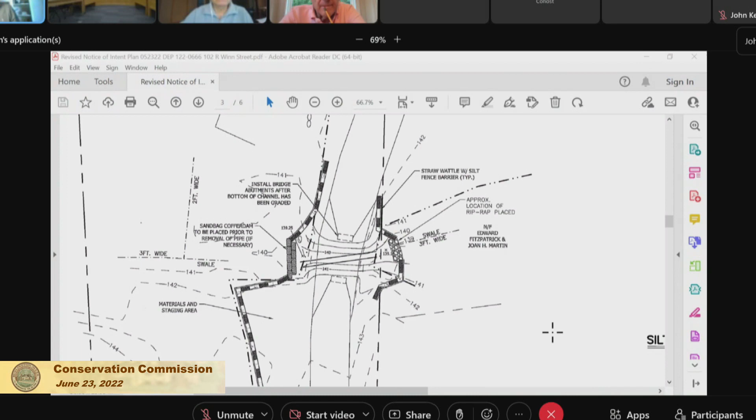He did, I think when we left the meeting last time, we were going to try to withdraw the old file number, but we're going to go in a different direction. I can clarify that. I probably made things overcomplicated last meeting when I said they should just close out the original order. The original order was for the construction of the house and the sewer line going under the stream.

And that was basically, obviously, the stormwater permit is part of the notice of intent for the construction of the house. Thinking further, we have this separate order for the actual work in the culvert, in the stream. This is all part of the same application. Well, the enforcement order was the result of unauthorized work in the culvert, which wasn't part of the original NOI.

So thinking about it, I realized I made it overly complicated. We just should keep both orders open. One order, the original order, was for the construction of the house. The sewer line is now not going under the stream, but it's still going to be in the buffer zone because it's going out to Duncan Road. So it's a less impactful project, and we can approve that as a minor engineering change, basically moving the sewer line from going out to Winn Street under the brook and instead going over to Duncan Road.

Then the filing for the crossing should stand on its own, and that's what you have before you on the agenda. Just the crossing, which was initially going to put in a box culvert to replace the round metal culvert. Since they no longer need that driveway, it's just going to be a footbridge with no culvert. So it's a big improvement on what originally was there, better than the box culvert they proposed. We should just approve that project and close this order out. So they'll have two orders of conditions: one for the house construction and sewer line, and one for this culvert/bridge.

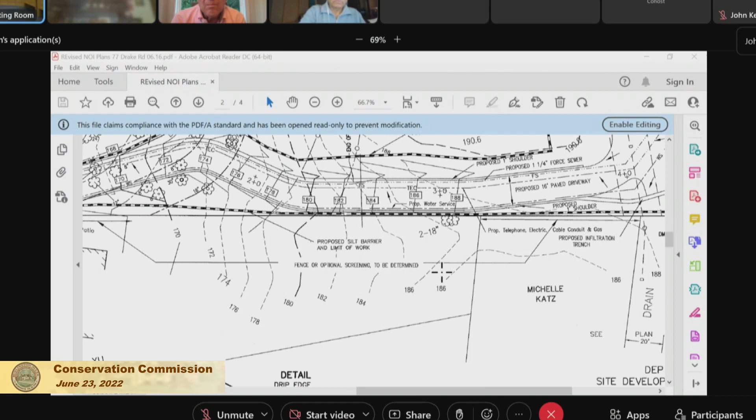And the same thing, Mrs. Katz, I don't think... well, I'll be looking into your lights. I said I don't think you'll be able to see it. Probably the last 50 feet of her property, if you Google it, you'll see that it's very heavily wooded. So go in there and put a few evergreen trees or something in there. But I'm happy to look at it at the time when the driveway's in and done, and I make myself available to my neighbors.

So the note is on the plan. All right, so it sounds like you want to be a good neighbor, is what you're saying. Sure, I'm gonna live there. I get it. Okay, now let's see if the rest of the commission has any questions, and then we'll see if anyone in the audience wants to participate, and then we'll go from there.

All right, so on this one, Indra? Nope. Okay, how about Ed? Anything further on this one? Nothing to add, thank you.

Okay, and Bill? I do want to state that I appreciate the amount of effort you put into working within the system and within all the rules. I know you had heard me speak against this project in a previous venue, but given the fact that the rules have been followed and the process allows for it, I wish you luck in this dwelling, and I'm somewhat envious. I think you're going to have one of the nicest house lots in town.

I question, I wonder, have you had any further discussion with the neighbor about the kennels? I have not. He was here at the last meeting. I told him when I got this wrapped up, I would be happy to sit down with him. Okay, I'm looking at it, I'll probably give him 6 months or 9 months, because it's gonna take me - the time I start the house, it'll be probably September, October. So I'm looking at probably having the house done by June or July, so I'll work with him.

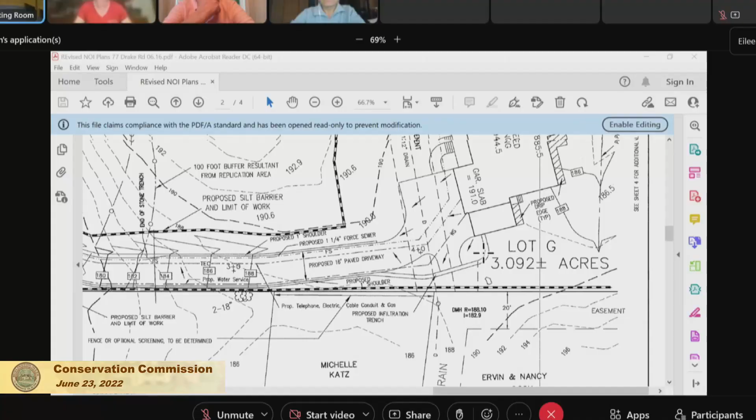Now the second thing - before you move on, the trees in the driveway area on the plan, actually shown on the plan - yeah, there's a limit of work around the house. If you lower it a little, the 100-foot buffer zone comes up fairly close to the house, yes, on the left side of the plan. So presumably there are trees in the buffer zone within the limit, and those trees are not marked on the plan, so we don't know what's in there.

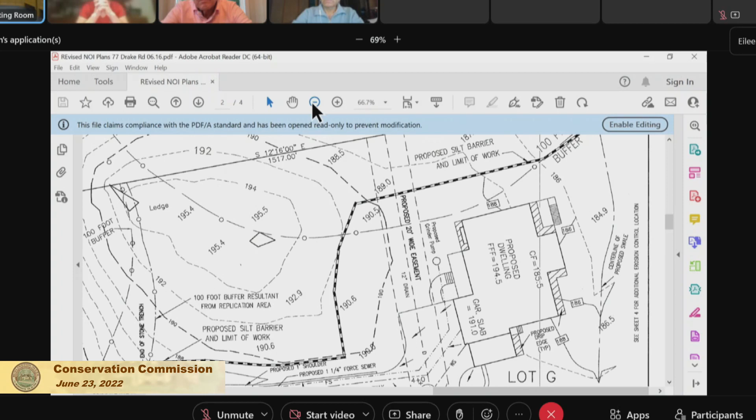Yeah, I've got plenty of room on the other side of the house. The only trees I would remove, when I get in there and get the house going, are anything that looks like it could be problematic in a windstorm or something like that. So does that mean you're not clearing the full limit of work? 100% of the limit of work, no, I'm not. It gives me that limit of work, but no, I'm not planning to clear all of it.

There's a lot on the front there. That limit of work, I'd say I'm probably going to stay 8 or 10 feet from it, but when we're grading in there, because right there it's not too steep at all, but coming up, as you can see the contour lines, it does get a little steep. Behind the house, I put the limit of work there and I don't plan to go beyond it. For the backyard, I'd probably cut trees there to give myself a backyard, but I'm not as concerned with the front yard.

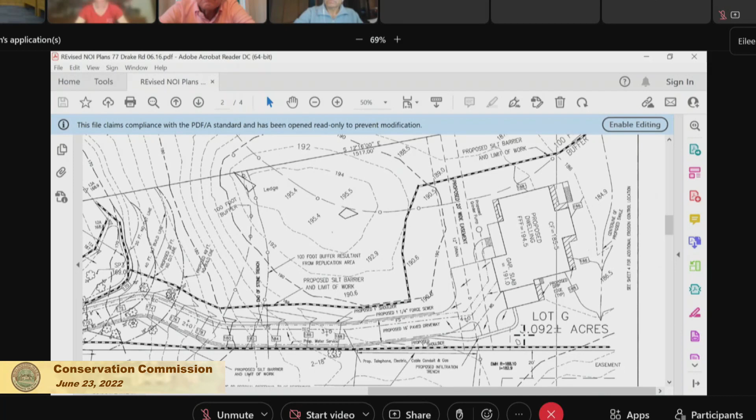And there's a lot of pavement - you've got the driveway for the garages. So if we have trees that aren't marked, you come and talk to us and we'll propose something. I'm happy to do that - get the area cut and we'll work it out. I'm not trying to limit you from having a backyard, that's not the point. The point is, normally we have a 1-to-1 replacement, and particularly in a wooded area it would be nice if there are places that need trees because you're taking some down - let the staff work it out with you. I agree with that. Yeah, I have no issue with it.

The backyard, I would clear - I think it's about 50 feet. Yeah, you may want to clear some trees, I'm anticipating, just for a modest backyard. When I get the limit of work all staked out with the hay bales and everything in, we can look at it. I'm happy to take a look at it. Then you'll know exactly what we're working on. Fine. Okay, you okay with that, John? Further adding the language about trees in there?

Permit, okay. If I could just make one note for the replication area - Gary, this is Leah Basbanes, Wetlands Consulting. Regarding the replication area, when Gary was mentioning leaving some of the trees in there, I'd ask that during construction we allow some flexibility and in-field adjustment. We need to get the proper area of 1,450 square feet, but we also want to save certain trees and not interfere with their root structure, so the configuration may end up a little different. I'd ask for permission for field adjustments to save the trees while still excavating to the proper size.

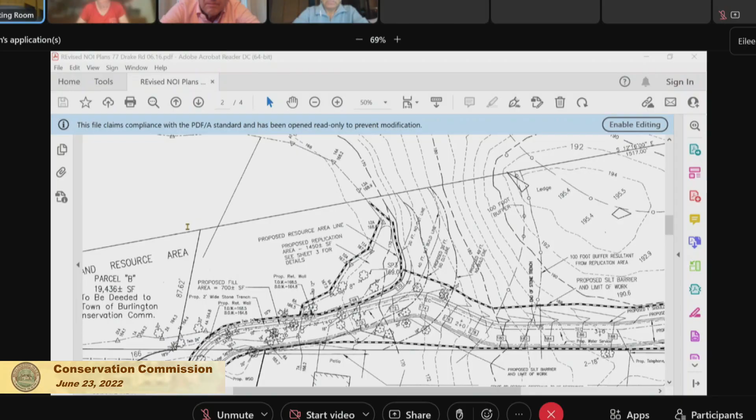Yes, thank you. So you must be pleased that this has gone through fairly smoothly. I am, but I stayed on top of it in the meetings we had - the original meeting I had with Leah and Chris Mello, back and forth several times before we came to see you. That was very helpful, and I think it shortened this whole process.

If you're pleased with the process, that must mean you're in a good mood, so therefore I can ask my question. I've got a couple comments I'm going to add first - I'm setting you up, so hopefully I'll get a good answer from you.

The area that you're proposing to give, we're very grateful for. It amounts to about 150 feet from the stream bank, the wetlands - I believe that's where the stream wetlands flags are, this is what I've penciled off with my ruler - and it's about 50 feet from the path. Would you consider extending the amount you'd grant to the commission for the whole 200-foot riverfront?

Somebody asked that at the last meeting, didn't they? Yes, they did, but I thought you'd be in a really good mood so I'd go at it a second time. Let me tell you, just to put a little more sweetener on it - it looked like about 270 feet. Right now you have between your erosion control about 320 feet, roughly, as I penciled it off. If you gave us 50 more feet and came up, you'd still have 270 feet from the back of your erosion control. I think I did it right. Okay, yeah, you're not far off.

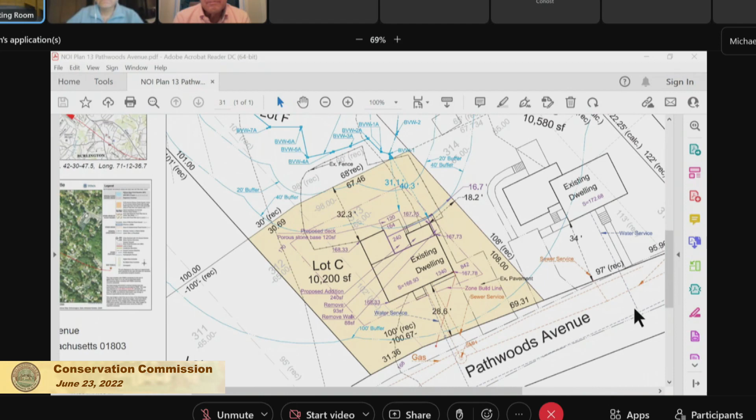It's owned by Michael Murray. You may remember we did the permit for that house there. And I believe he did send a note to McLaughlin saying that it was his property. I thought that once we have the order of conditions in hand, we would talk to him and see what he would like.

Oh, because I had put something in the conditions about this. If we can touch on it, if he makes an issue about the fence, we will, but if he's not gonna ask you to move it, then why would you? That's exactly right. So if he will let the fence stay in place with the agreement that we understand it is his property, that would work for us as well.

Okay, anything further, Eileen? That's my only question. All right, so, Ed, anything further? This one is 13 Pathwoods Avenue.

It's an addition onto an existing house. I have nothing to add.

All right, how about Indra, anything further on 13 Pathwoods? Well, they are our neighbors, very good neighbors. And I do not have any objections. I think this addition would look very nice in this area.

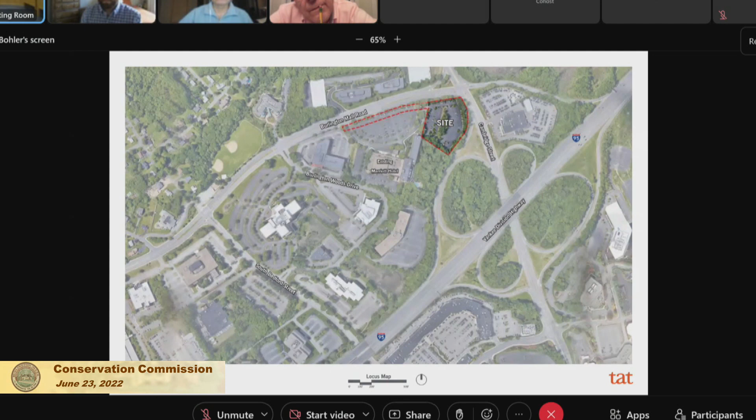0.75 acres is the site of what's being redeveloped. We've kept the, and just for context, so Burlington Mall Road's on the top of the page, the southeast corner, you see I-95 running along there, and then more north-south is Route 3A. The very beginning of the Burlington Mall Road here. Brad, if you want to click forward one slide, we get zoomed in a little.

Proposed development, again, we've kept it in the limits of the existing parking lot that's there. We've actually pulled back about 8,600 square feet of pavement that goes away as part of it. Greens up, we've got a rain garden, and we'll get into those details, but we've introduced some new green with this concept. We're really focused on keeping development in today. And there's a big, if you're out there, there's a large mound of ledge right in the middle that will need to come down as part of this development. It's really where the building is.

Click forward, Brad, and you can see in the bottom of that page is the hotel that remains pretty much operating the way it does today, and they keep their parking field out front. And there's some more on the planning board. There's been conversations of sharing parking and not over-parking this development. So getting the right parking, because they're actually very complementary parking uses. You have the laboratory, CGMP.

So the building in blue is really the lab, more like an office type building, but a laboratory focused building. And then the yellow box is what we call a CGMP, which is really the manufacturing part of the laboratory business. So you have a 4-story, and I've got a few architectural images to give you a feel for what that building looks like. We really have a 4-story blue box and a 1-story, but very tall for the manufacturing. It's a tall 1-story. It's shorter than the blue box, and they're both shorter than the existing hotel.

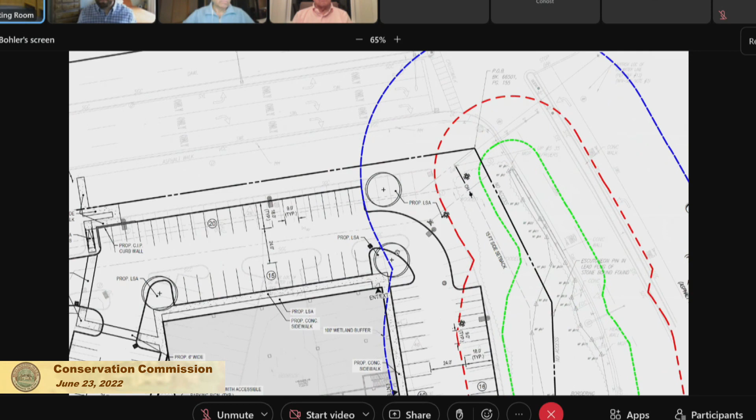I think we'll have some general questions and initial comments, and between now and the next meeting we'll have a site visit. Not sure they're finished. Finished? No, we have a couple more slides. I wasn't assuming, he was just asking. Another couple hundred slides. Yeah, we can go quickly through these.

I think the most important thing here, in addition to the rain garden, is we do have a large infiltration system to take the roof runoff. So we're taking the clean water off the roof and putting it into an infiltration system.

We tried to meet all the stormwater standards for redevelopment, which this qualifies for. We did try to get a very high level of treatment, so the parking lot gets the full 1 inch — we're shooting for 1 inch rather than a half inch water quality volume. We do get that for the parking lot. We're a little short on what we can infiltrate for the roof runoff, mostly because we're sitting in C soils, which are okay.

They're a little slow, but the bigger challenge on this site is the ledge. There's probably a 20-foot, maybe 15-foot tall ledge outcropping right in the middle of the site. What we found is we have records of when the site was developed, so we know this corner where we put these infiltration systems was filled in. It's filled material, not natural, but we know there's no ledge there because it was filled in. That gives us an opportunity to do some infiltration.

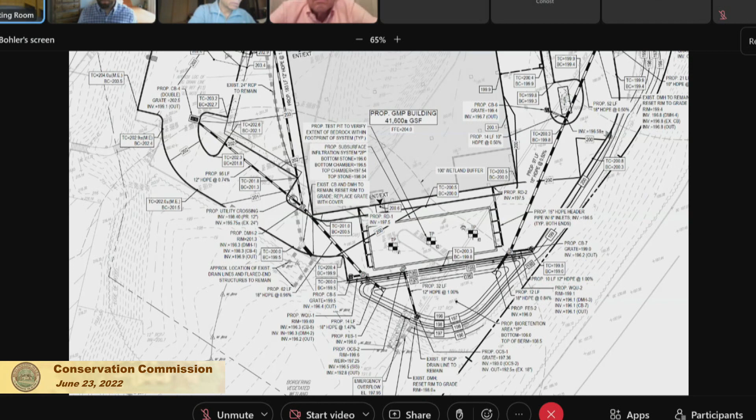We didn't think it was right to claim redevelopment and not do anything, but we're about a half inch short on the roof infiltration from a water quality standpoint. So we're shooting for the 1 inch but were only able to get to a half on that — still better than zero. We're trying to work with the site conditions rather than claim there can't be any infiltration. We found this as a zone where we could do it, so that's probably the biggest thing.

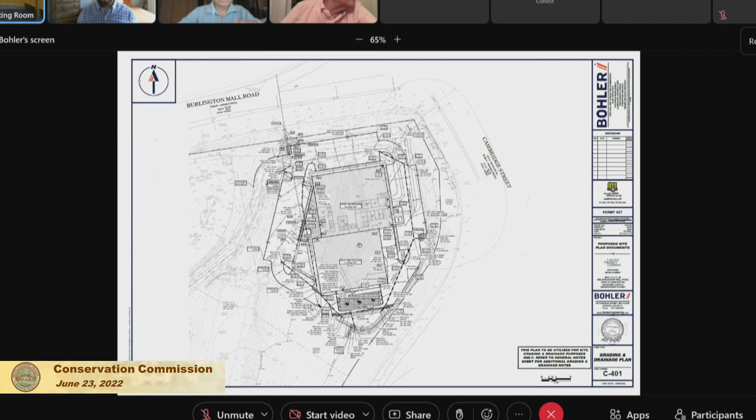And again, we're collecting water quality devices before it gets to any infiltration. Next slide, Brad.

This... give me a little.

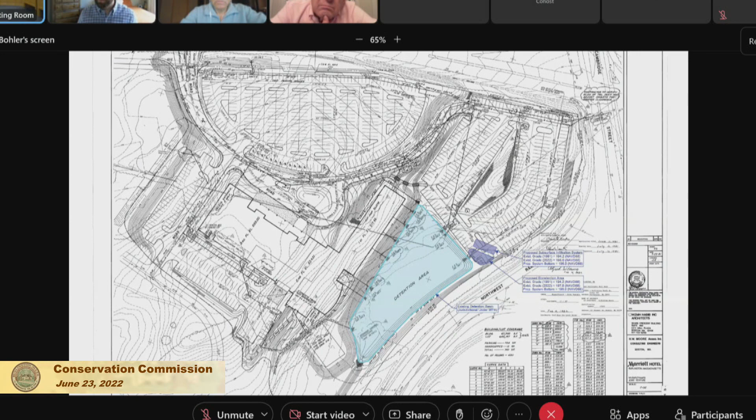This is what I was saying about looking at the grades — you can see several contours here. This was the development of the hotel; you can see this was near the detention area. Again, we acknowledge it's jurisdictional now, but it was a constructed basin. This shows there's fill in this corner, which we're trying to capitalize on. This shows the rain garden and infiltration system.

A little of our analysis shows we have 2 feet of separation from original grade, so we feel confident we're more than 2 feet from ledge or groundwater.

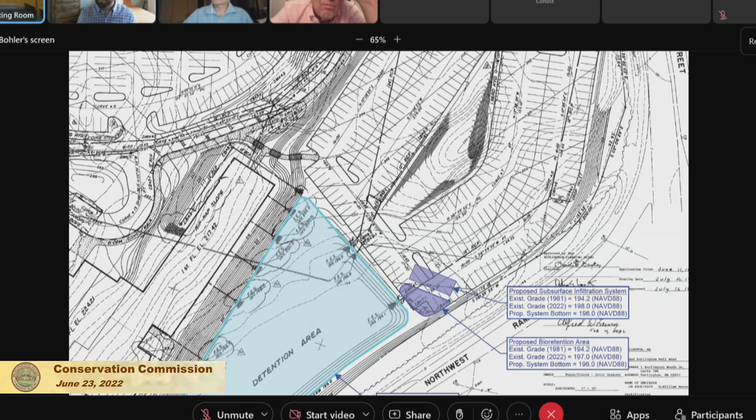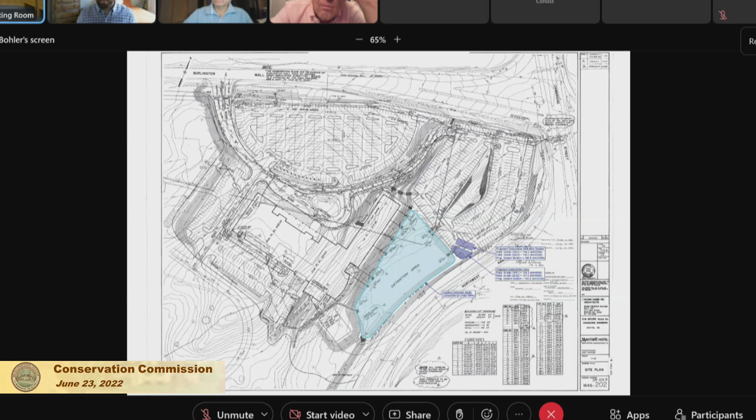I think we can move to the next slide. You'll be doing test pits to confirm your assumptions on separation? Correct, we have it in there. So it looked like you had 3 test pits shown on the previous slide — are they proposed? They're proposed, yes, we wanted to make sure they were captured on the plans. Gotcha, so we don't forget to do them in the future.

This is just showing the utilities for the property. They're either on Cambridge Street at this intersection or on Mall Road, so we're bringing them up the parking lot. There's likely some electric and telecom that cuts through the woods there, to be determined by those utility providers, but we've shown our best guess on where those are going to go, just to get that scope of work captured in the plan set.

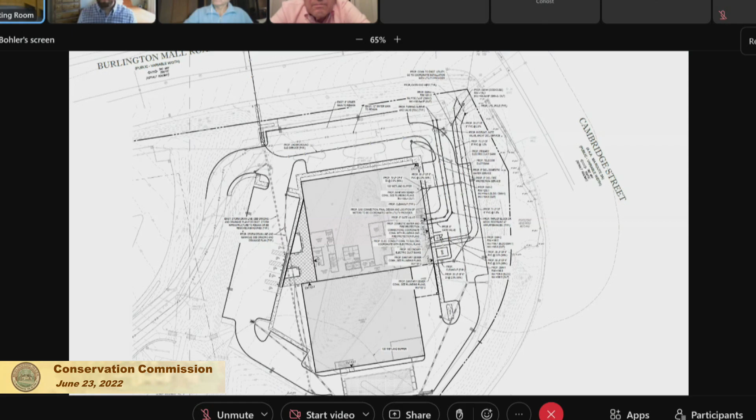This is the landscape plan. Obviously you're not going to see the details at a distance, but we do have a landscape plan that shows the rain garden application and the new trees coming into the landscape islands.

Unless there's questions on the planting plan, we can go to the next slide.

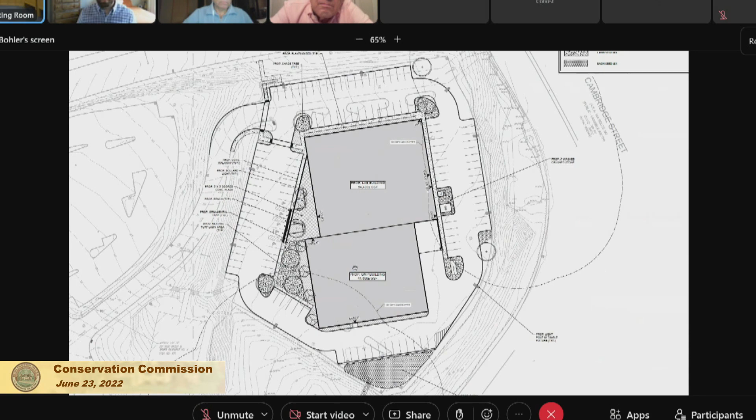These are some more for curiosity's sake, just to show you a little bit of what I was saying. There's pretty good healthy trees along the Mall Road, and then again lining the 128, this is the 128 on-ramp there. So we're keeping that, and we've put the building right in the middle of the site. Again, trying to keep grades and keep that limit of parking inside what's there, really be able to keep as much of that buffer.

Is that structured parking I'm seeing there, or is it just the way the building's designed? It's just the way the building is designed. The nice thing about a lab use is it's very low parking demand—lots of equipment and other things going on in this space. So we do meet the full zoning requirement for parking, but we're able to do it with limited surface parking around the building.

Where on this picture is the actual existing wetland showing? So you have a little wetland here, down in there. Actually, it's more up in this area. And then the other one is this area between the hotel, back, and the rain garden will be down in this corner here.

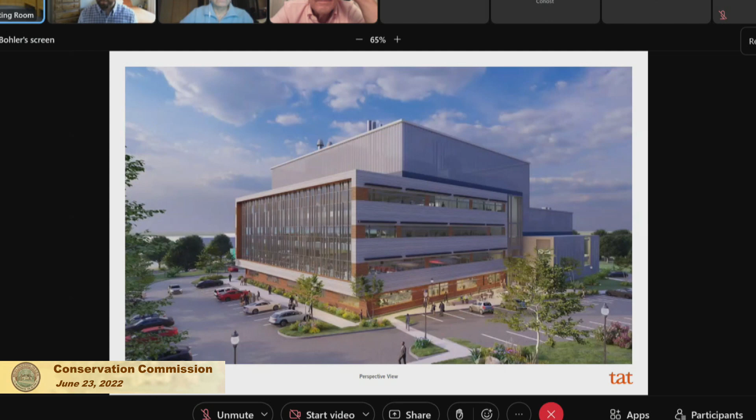So that's our presentation. Again, the architectural slides give more context of the building and show a little bit of that perimeter that we're trying to be sensitive to, but happy to answer questions.

So what we'll do, to get the process started, is go to staff and see if they have any initial comments. Then we'll take comments from the commissioners, not expecting answers to everything because it takes some time. We'll make a list and go over that at the end, and we'll see if there's anyone in the audience, which I suspect there may not be, and then we'll go from there.

So John or Eileen, do you have any comments for us? Sure, I'll take this one. With regard to the wetland resource areas, I have not gone out and checked the delineations yet—I'll do that next week.

With regard to stormwater runoff, the reduction of pavement is clearly a good thing, so that's a positive. It looks like their stormwater management plan meets the stormwater standards—they're meeting the standards for TSS removal via the catch basins, the hydrodynamic separators, the Contech units.

And how about the phosphorus standard? It's going into a rain garden. We haven't asked them to calculate phosphorus removal, but a rain garden is the way to do it—that's really the only way, other than the underground infiltration they're doing on the rooftop. Infiltration is the way to achieve it, or put it through a rain garden, but we haven't actually asked for those calculations. It's a pretty small site, so they don't actually hit the threshold for having to do the phosphorus calculations.

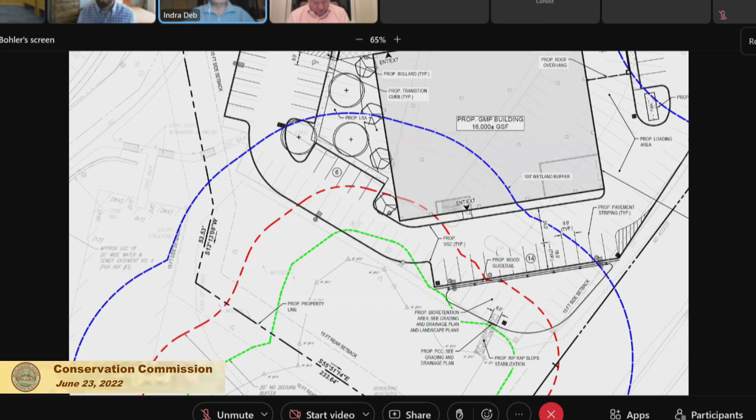You can always come back for more, yeah, anyway.

Ed, anything yet on this one? Nothing for me yet. Okay.

One thing I did notice, and I go back a few years, I don't know how much this property specifically relates to across the other side of that property on Mall Road, but the buildings over there have sunk about 2 to 3 feet over time, going back a few years. I don't know if that relates to this side of Mall Road or not. Is somebody even aware of that? The reason I bring it up is that's when I had a Corvette and they had to get me towed off the top of the garage because I had sunk into the garage roof. So I'll never forget that, how much that actually dropped. Just kind of curious more than anything.

All right, what year Corvette was that, Ed? 2001. All right, thank you, we'll note that for the record.

Okay, Bill? I think it's a good plan. I like the fact that it's all within the existing paved area. I like the rain garden, regardless of what the Board of Health says, and the infiltration system, the reduction in impervious area is significant, 8,600 square feet. I like the stormwater plan, I thought it was clear, well-written, and very readable. So that was one of the better ones I've seen.

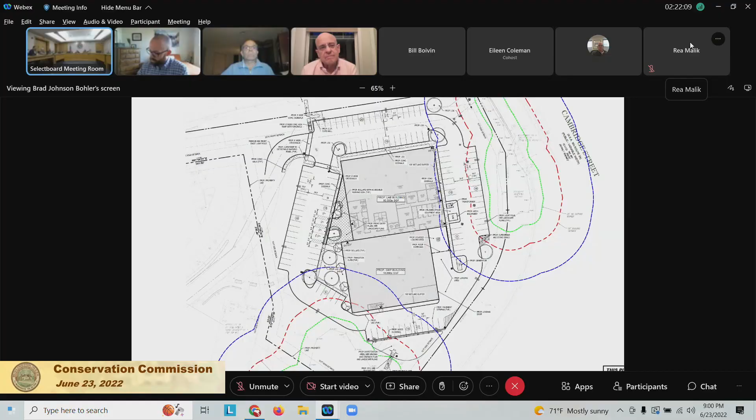I have a question sort of outside our jurisdiction, but I always want to ask it. How are you handling the heating and cooling of the building? How green is the building? Are you going to do electric heating and cooling? Any opportunity for solar on the roof or anything like that? We're working with our engineers right now, so I don't have an answer for that. We're in the process of developing all of that. I just think committing to a natural gas type of heating or cooling system now is going to be problematic in the future for not only the owners and managers of the building, but the environment. So you can get an electric system. Yeah, we've been looking into all that. Okay, are you looking into a green roof as well?

Funny you should ask, we are. Not so much a green roof, but some planting on the roof, particularly in front of the penthouse screen, so it's got some green to it. We're developing that too, based on comments we heard from the planning board.

We want it to look good, so that's the material for the penthouse screen. We're finding something that's not translucent, but at least you can see through it, so it doesn't look like this big solid wall.

We're also looking into getting some planting in front of that. And again, not our jurisdiction, but since this is a major entrance into the community, are you planning to have signage on it—something tasteful, not a large obnoxious company name on the side? Right now we don't have any plans for signage, but it'll be tenant-driven. Anything we do will be tastefully done.

For that reason, it's the first thing you see. We don't want this—like a Citgo sign there, you know.

I have a couple of general questions. One is, how does the handling of stormwater off of the parking lot compare to the existing condition—is it an improvement? Is there a write-up anywhere in the materials that shows here's what you have and here's the improvement on how we're handling stormwater?

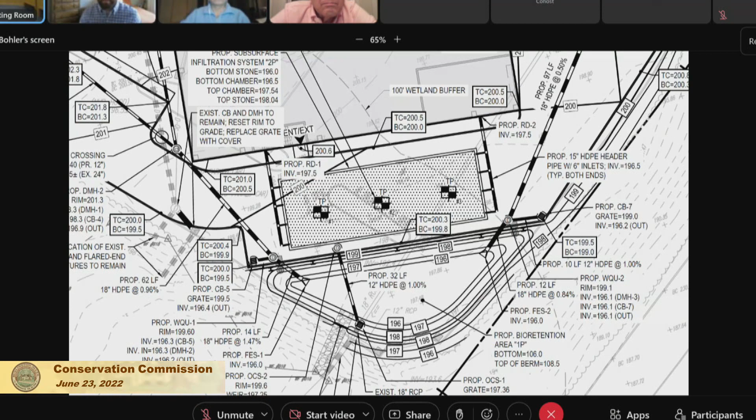So the parking lot water goes through the catch basins, through the sump, then to the rain garden—is that what's going on? Catch basin, sump, water quality treatment unit, then rain garden. Correct.

Are you aware that in residential areas, the Board of Health has had a longstanding concern about rain gardens? I am always concerned about rain gardens and making sure they are functioning well.

Okay, well here's the thing—I was looking at some recent literature that referred to newer designs using a combination of stone and plantings, so there's minimal surface area with standing depth, even when the water fills up. Have you seen any of that? If it can be done, could we use this rain garden design as a prototype for a safer rain garden—one that doesn't just have a pool that fills up with a few plants in between, but is designed so the water fills between stones and plants instead?

I don't know if you've ever seen any of that. Is it possible you could look into that for us and see if we could get like a prototype demonstration, if something's feasible to be done? Because the reason I say that is so much of...

the regulations are moving towards low impact development. And I just heard a presentation for the town that talked about heat islands in different settings. One of the most common things is obviously removing pavement and putting in rain gardens. Well, the problem is putting rain gardens in all over, the Board of Health is going to get apoplectic about it, because they've had this longstanding concern.

Safety hazards. So if you could look into that and say, well, we could design this like this, and we think it could be sort of like a prototype demonstration of how it could be done, that would be a major contribution to the town as a whole.

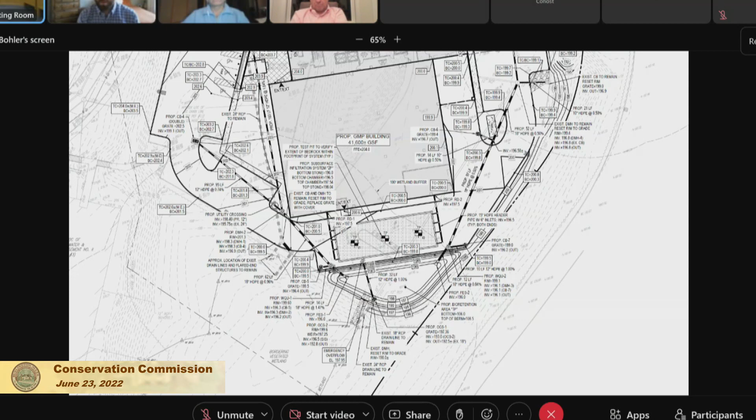So we could reduce that. Again, we've designed it for the 1 inch volume. As a redevelopment, we could agree to do a ½ inch, which is still a high level of treatment. 1 inch will definitely take care of your phosphorus, though. 1 inch will definitely... I'm reluctant to. Well, why don't we see if we can do the phosphorus?

Our designs I've seen use stones and the pore volume between the stones to allow the water to fill up, and you end up with just a few inches of water above that. And essentially it becomes a non-safety issue.

They're looking for the volume of water without the depth of water on the surface. But you need the plants to remove the phosphorus. I know that. So what they have is something with plants in between, and instead of having dirt coming up between the plants, there's a bit more stones.

Could you look into that for us? Plenty of designs, why don't we take a pass at it? We'll have a conversation with the Board of Health about what's an acceptable drawdown time. Maybe you can look at state-of-the-art designs that make it more child-safe. I know that's not the case for commercial areas, but it would be nice if it could be designed that way. Yeah, I think we can do that. Okay, not just shortchanging the treatment.

Well, there's a finite amount of space we have to work with, so there's going to be trade-offs between the volume of water that can be stored and infiltrated. The more stones we put in, the less volume there is. I get it. Let us take a look at it, take a pass at it. It may not be feasible, and I get that.

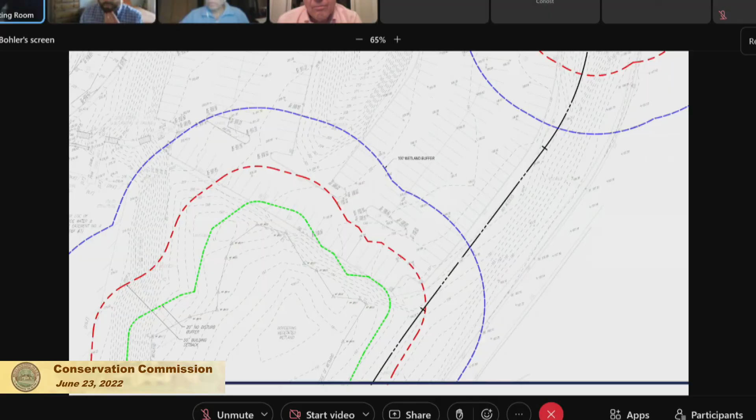The other thing is, we haven't looked at the site—it looks pretty well treed with mature trees around the edge. Are there any areas that would benefit from some tree plantings? Because I listened to the presentation on a heat island study, and the whole place is turning into concrete and asphalt, which has very detrimental effects for a lot of reasons. Is there any area that's bare? The picture showed it all pretty well filled out, but...

Again, the perimeter stays, all the mature trees around. Are there large patches of bare area that could benefit from planting at all? It's pretty dense. There's a couple little gaps out to Burlington Mall Road, and even here it looks pretty well covered.

There's one spot that, based on a conversation with the planning board, we're going to put a walkway connecting the new building up to the sidewalk on Mall Road, because the elevations worked out well. I could tell from the picture that was the case, but I thought I'd throw that out there. Yep, and there's an opportunity to plant more trees if there's space. We'll take a look when we're out there, but it looks pretty well treed. And then we do have new trees coming in the new parking islands that are being built. Right.

Are you doing any treatment—is all of it being conveyed to catch basins, or are you planning any low impact development, say in the middle of the parking lot, for catching rainwater? It all goes into the catch basin so we can get it through the treatment units. Okay, got it. We're not doing any surface flow into the basin, especially not right on top of the ledge. No. Okay.

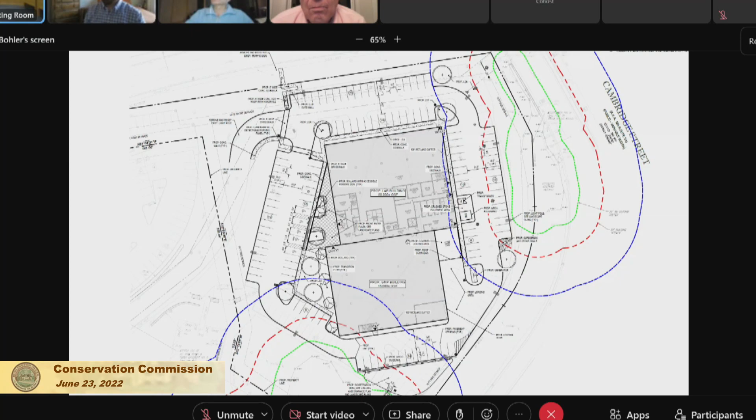And since you're doing stuff with that, is there anything you could envision - could you take a look at that? I don't know. There's currently a sidewalk that goes from the lower lot up to the Marriott, and that will remain. But that's not what I'm talking about.

Well, there is also the part, not part of this application, but the Marriott is considering some sidewalk connectivity through the back to the Burlington Woods development, I think in response to the planning board referencing the same.

Do you know the people at the Marriott to talk to and ask them what they're thinking? I can show you what they're thinking. But it's just really connecting through the Marriott.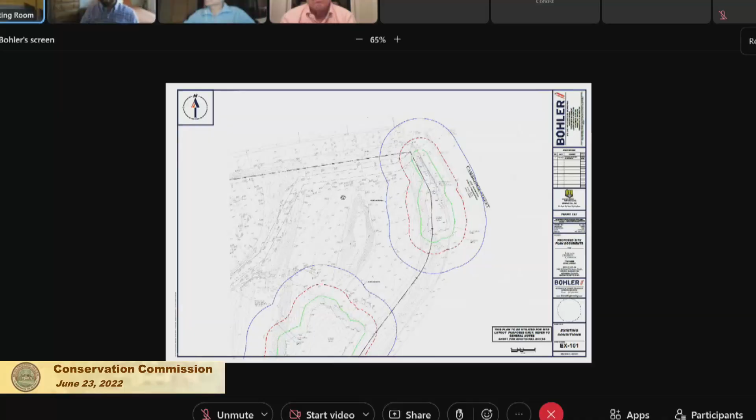Brad, I don't think it was in the slide deck, but it might be in the back. Oh no, you've got it here. So that one works. So the Marriott - these again are not part of our application. Right, but they have...

Some just sort of vehicular improvements at their drop off. And then talking to the planning board was to create this connectivity, right? The sidewalk on Mall Road - we have a connection to bring our folks directly out to the sidewalk on Mall Road. There's sidewalks along the driveway here, again connecting these two buildings, but then to introduce a new sidewalk out, and this is the Burlington Woods development.

So again, creating connectivity from Mall Road through here - where it goes from here, that's, I think, out of our purview, but it was in response to how do we start creating some of that connectivity. So are you thinking of a sort of path connectivity around the entire site? No, I don't think there's really an opportunity through here. It would be down in the wetlands. Well, around your buildings is what I'm talking about.

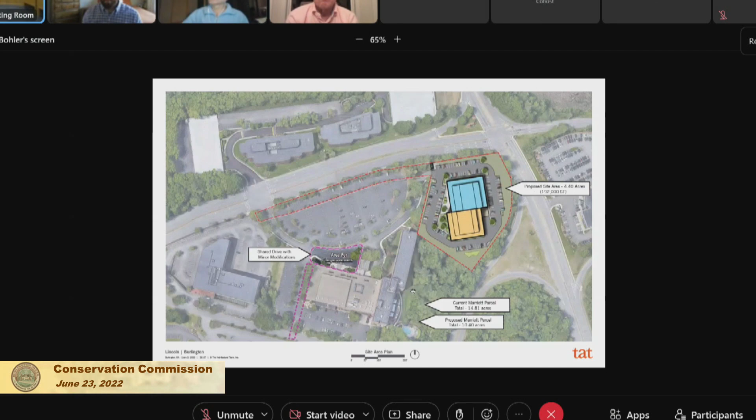Yeah, this is really back of house back here. So the connectivity is on the front of the building. Okay, all right.

So maybe just give it some thought in case there is something that can be done to enhance it. Burlington is really bereft of good walking connectivity from place to place. It would be nice if every time someone comes in like you folks, that we ask them to think about what can be done. I'm not sure there's much you folks can do, to be honest, but maybe you could put it on the list to look at?

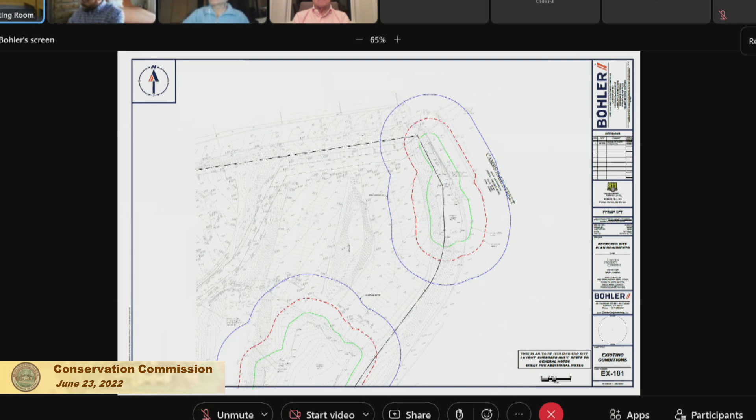Absolutely, and like I said, it is a planning board focus as well. I'm sure we'll be talking with them on the 16th when we go back. Tell them that we asked about it.

Sure. John, maybe when you conduct your site walk, you could take a look and see if there's anything jumping out at you. From my walks back there, there's some pretty steep slopes that go right to the bottom of the wetlands, so it doesn't lend itself. There's no obvious path, nobody walking back there today, and it's right along the edge of the highway. Right, it might not be the right opportunity, which is why we put the path up.

I understand, traditional sidewalk, I understand. I think I understand what you're trying to achieve. I'm just not sure there's the opportunity here, but I understand the steep slopes going into the wetland.

Is there anything else from anyone? The next meeting is July 14th. And I assume you'll want to come back and talk more? Yes. Okay, all right, does that sound right?

Are you going to make a motion? Vote to continue, motion to continue. Could I have a motion to continue the hearing for 1 Burlington Mall Road to our next meeting of July 14th? Second? Second, Ed. All right, Ed, how do you vote?